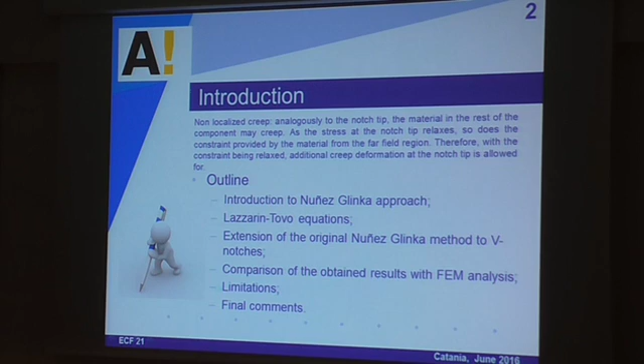First, for non-localized creeping condition, we mean a situation in which all the material far from the stress concentration zone may creep as well. So we need to take into account the contribution of the far field to the notch tip deformation. Just a few words about the motivation.

We know that geometrical discontinuities such as notches need to be carefully analyzed. The knowledge of strains and stresses in such stress concentration zones is essential for an efficient and safe design process. It appears from the current literature that what's needed are numerical or analytical tools enabling the analysis and simulation of creep deformation near notches. We would like to provide strains and stresses ahead of notches that can be used as input parameters for creep models, for strength and fracture evaluation.

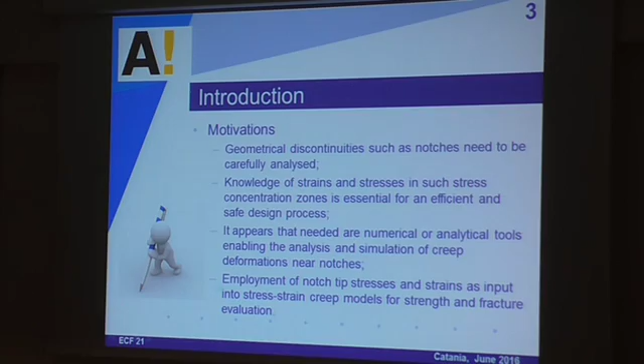Briefly, the Nuñez-Glinka approach has some assumptions. The most important ones are that it was based on the Neuber rule extended to time-dependent problems, and on the equivalence of the total strain energy density at the notch tip. Putting together these two hypotheses, they derived a set of equations to be solved numerically.

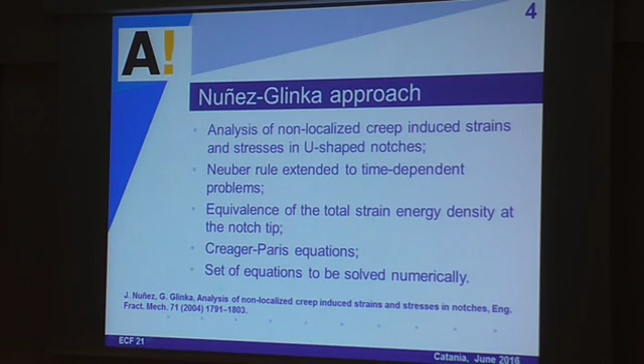For the elastic stress-strain distribution, Nuñez-Glinka employed the Creager-Paris equation. So their method is limited to U-shaped notches, because the Creager-Paris equation is valid just for U-shaped notches. The set of equations to be solved numerically are shown in this slide. As I told you, I'm not going into detail in the analytical framework for the sake of brevity.

These equations are the same equations that we used also in our method. We just changed, as I will show you later, the linear elastic equation. So we changed the definition of some parameters in this equation.

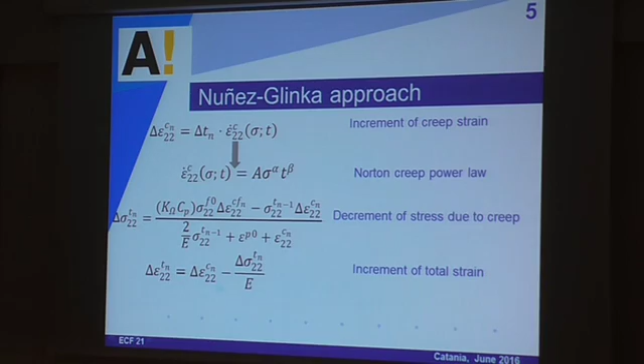So we have the increment of the creep strain, the decrement of the stress due to creep, and the increment of the total strain. The most important one is the decrement of stress due to creep. As you can see, we have a lot of variables, but the most important one is this factor, which represents the effect of the far field creep on the notch stresses and strains.

So it's like we are considering here the far field effect as an extra energy input to the notch. We evaluate the total strain energy density far from the notch, and we magnify it through the same energy density concentration factor, that is the ratio between the total strain energy density close to the notch and the total strain energy density in the far field in the elastic regime. So we added this magnification effect to the total strain energy density at the notch during creep.

We have another important parameter, the plastic zone correction factor. It was defined by Glinka following also Irwin's definitions. We need to define also the meaning of far field creep. Glinka suggests taking the far field contribution at a distance equivalent to 3 times the notch radius.

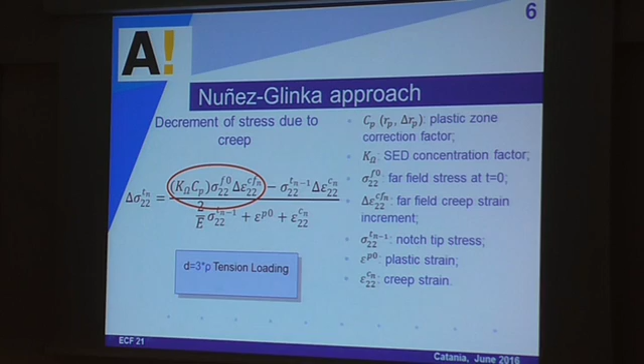So this is the very simplified time integration algorithm of Nuñez-Glinka. We have to evaluate the linear elastic contribution, employing in this case the Creager-Paris equation, and also the first elastic-plastic contribution, in this case employing the Neuber rule, but we can also use, for example, the equivalent strain energy density or simple finite element analysis. After that, we evaluate the creep strain, the stress decrement due to creep, the total strain, and we repeat this time integration until we reach the total time t.

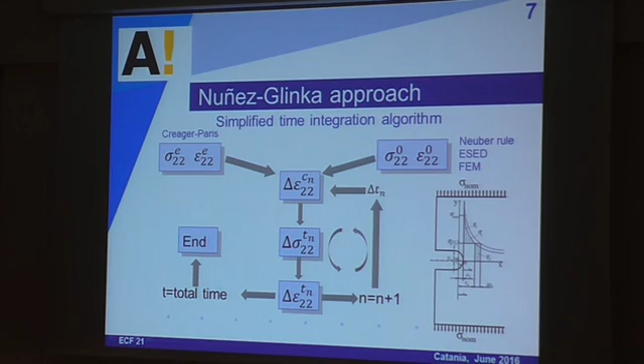The Nuñez-Glinka approach, as I already told you, was limited to U-shaped notches because of the employment of the Creager-Paris equation. So our idea was to use the Lazzarin equation instead. The Lazzarin equations are a more general formulation of the stresses and strains distribution ahead of notches. They can be applied to U-shaped notches, blunt or sharp notches, and even cracks. So the Creager-Paris equation is like a specific solution of this more general equation.

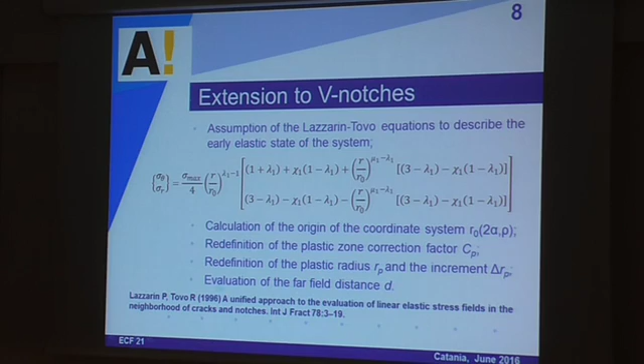Redefining the elastic distribution, we need to redefine all the parameters from the previous equations. The most important is the definition of the plastic zone correction factor, which is a function of the plastic radius and the increment of the plastic radius. As a function of the geometries, we also need to change the evaluation of the far field distance d. So how do we define the plastic zone correction factor and the plastic radius?

Once we impose a yielding condition together with the Lazzarin-Tovo equation, we can obtain a first approximation of the plastic radius. Assuming an elastic-plastic behavior of the material inside the plastic zone, we carry out a simple equilibrium of forces between force F1 and force F2. Solving this integral, we obtain a first approximation of the plastic radius increment as a function of F1.

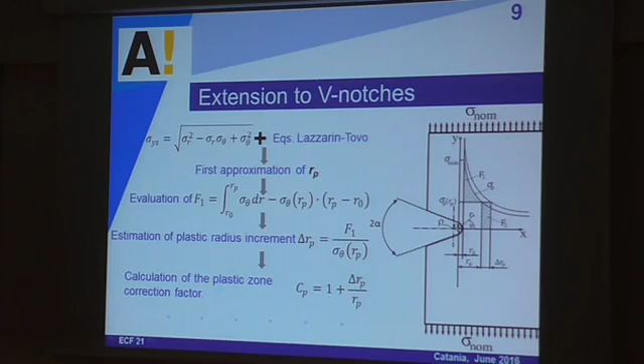Once we have the plastic radius and its increment due to stress redistribution, we can evaluate the plastic zone correction factor as defined by Glinka and also by Irwin in previous work. With simple substitution we can obtain the explicit formulations. I'm not going into details here for brevity, but let's say these equations become a little more complicated when employing the Lazzarin equations.

Once this method is implemented in a numerical tool, for example MATLAB as we did, these equations can be easily solved in a very fast way. It's like an automatic process—we don't have to evaluate these equations each time.

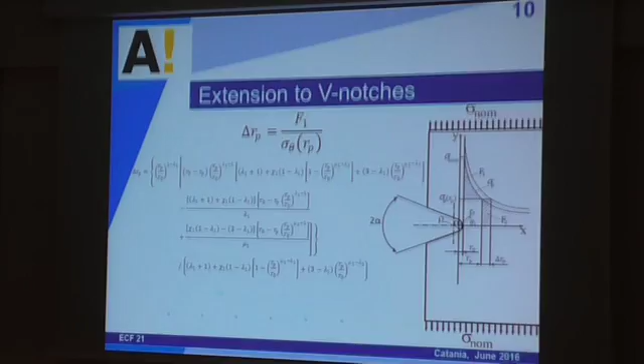We employ the same simplified integration algorithm, but in this case we use the Lazzarin equation. After that, the procedure remains the same: we evaluate a first initial elastoplastic contribution, for example with the Neuber rule. Then the creep strain, the decrement of stress due to creep, the total strain, and we repeat over all the time t.

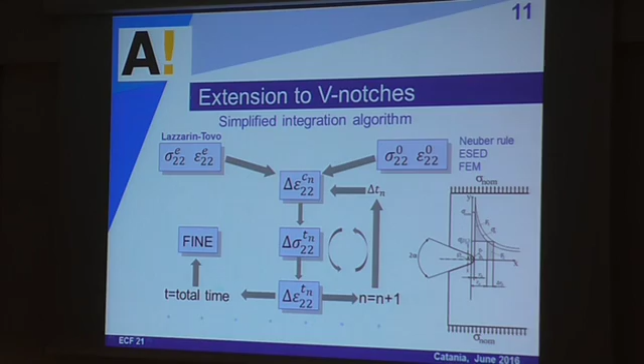We implemented our method in MATLAB code and compared the results obtained from the numerical viewpoint to a finite element analysis carried out through ANSYS APDL. These are the material properties we employed, and we considered several notch geometries. We varied the depth of the notch, the notch radius—moving also to small notch radii to see the effect of these parameters—and different opening angles.

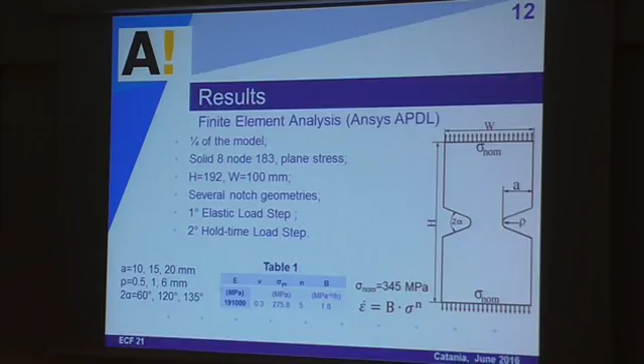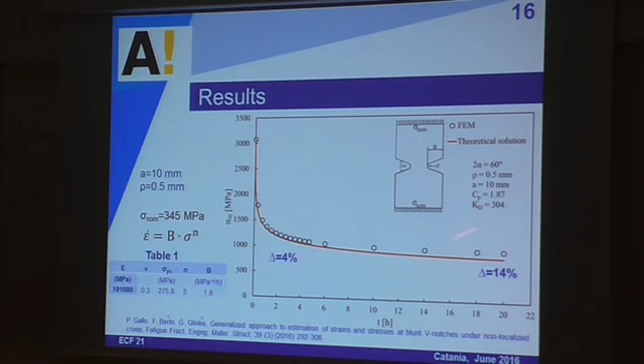Summarizing: the Nuñez-Glinka method was limited to U-shaped notches and has here been extended to a wide variety of notches. The key to this extension was to select the Lazzarin equations to describe the elastic state of the system. The numerical and finite element analyses show very good agreement between the theoretical and finite element results. The higher error values were found for very large time t, mainly because of extensive plastic deformation. If we neglect the far field contribution, we can also easily derive the localized creep condition, a situation with no influence from the far field creep.

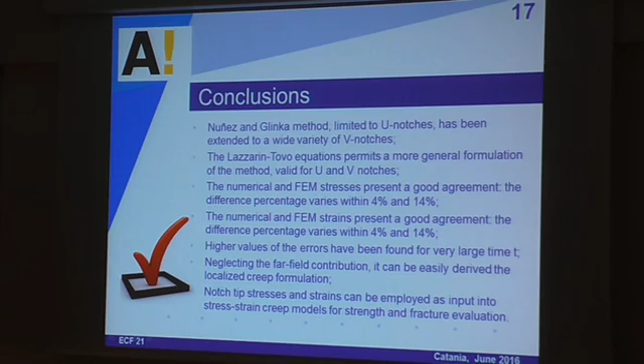Our notch tip stresses and strains can be employed as input into stress-strain creep models for strength and fracture evaluation. With our approach, we don't need any more time-consuming nonlinear analysis—we just have to employ the numerical method.

As a future development, we know that local approaches based on stresses and strains fail when the stress fields tend toward infinity, for example for cracks or very sharp notches. Even though the Lazzarin equations are valid in this situation, we can no longer employ local stresses and strains directly. So our idea is to move to an average strain energy density rate as a creep design parameter.

We obtained some preliminary analysis just to understand if there is any meaning in proposing an average strain energy density in this case—trying to understand if we have the same advantages as for linear elastic assessment with strain energy density. I cannot show you these results here for the sake of brevity, so we will see maybe in the next ECF.

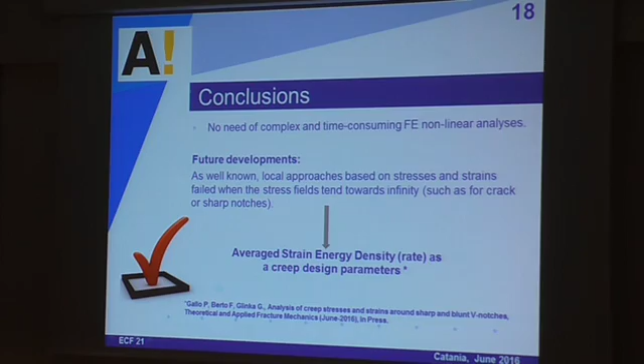Without any power or electricity loss, so I'm very glad. Thank you.